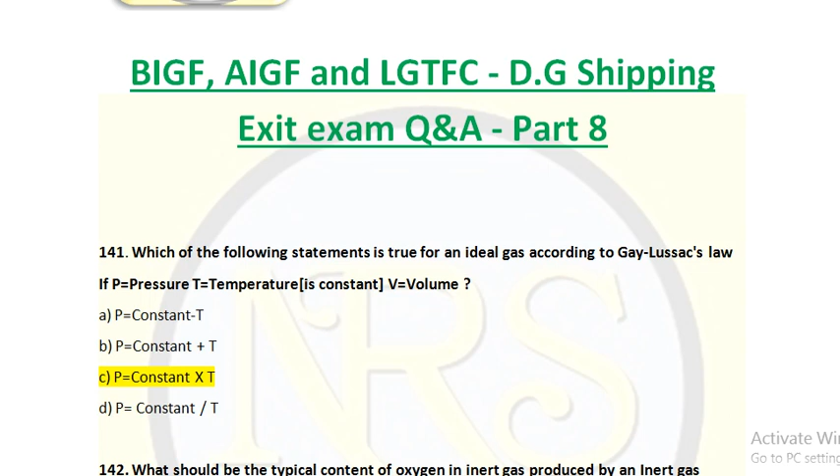Question number 142. What should be the typical content of oxygen in inert gas produced by an inert gas generator on board an LNG carrier? Option A 0.5%, option B 12.6%, option C 7.5%, option D 13%. The correct answer is option A 0.5%.

Question number 143. How is intrinsic safety achieved for electrical circuits used in hazardous spaces? What they are asking is how any light, any equipment is considered safe to use in the hazardous space. The answer is by limiting the ignition energy and surface temperature that can rise during operation. So they are reducing the ignition energy, the combustion energy, and the surface temperature, which would lead to a hotspot.

They are reducing it, they are limiting it, so that will help in operating condition. When it is operating, this will not occur. It will not release such a high heat energy. It will not become a heat source for combustion to happen. That's what they are trying to say. So question number 143 answer is there.

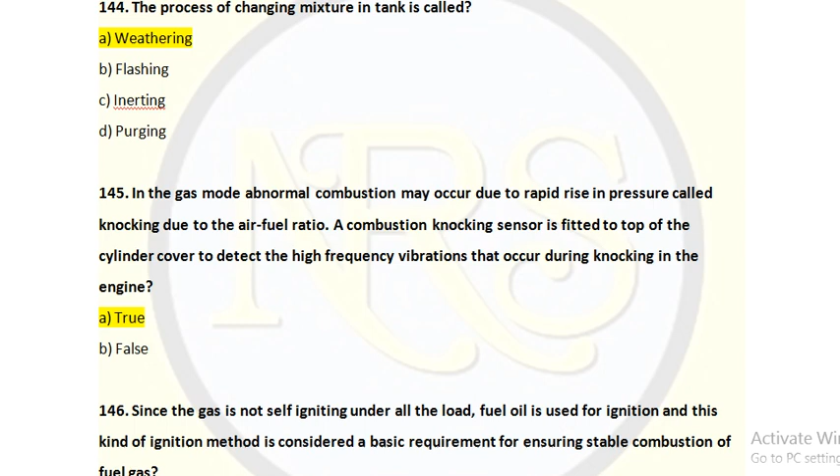Question number 146. Since the gas is not self-igniting under all loads, fuel oil is used for ignition, and this kind of ignition method is considered a basic requirement for ensuring stable combustion of fuel gas. Option A true, option B false. Correct answer is option A true.

For non-self-igniting gases, say gas has an auto ignition temperature of 553 degrees Celsius to around 1103 degrees Celsius. So this is varying. Auto ignition temperature you can take as 595 degrees Celsius. It can vary with the combustion gas, since the gas consists of methane, propane, butane. With the ratio it will vary.

So we generally take it as 595 degrees Celsius, which cannot be achieved by compressing the air. The compressed air will not produce that much temperature. So in order to achieve this, we need some pilot injection that will create an initial ignition. That ignition helps to raise the temperature to 595 degrees Celsius or above. Then the gas gets heated and it will be burned in a complete combustion process. So this is correct. So question number 146, option A, true, is the correct answer.

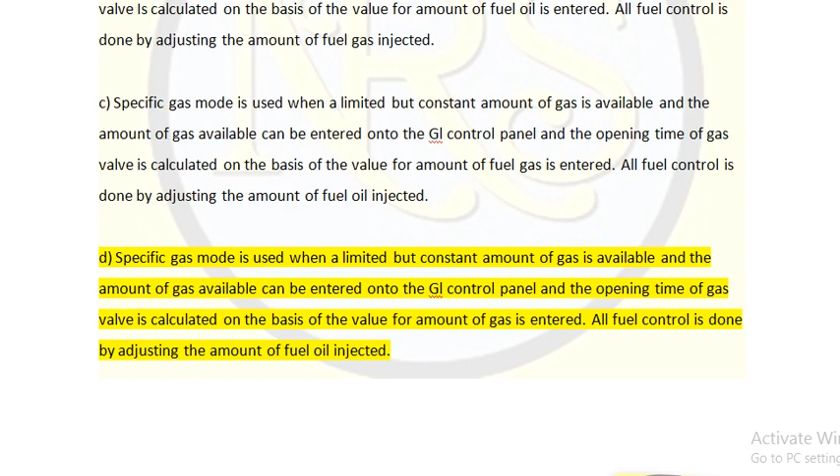Option D: specific gas mode is used when a limited but constant amount of gas is available, and the amount of gas available can be entered onto the GI control panel, and the opening time of the gas valve is calculated on the basis of the value for amount of gas entered. So what they are telling is, in specific gas mode a constant amount of gas is available. The amount of gas available can be entered into the GI control panel. This is nothing but the GVU unit, control valve unit.

In the control valve unit, the opening time of the gas valve, how much it will open, is calculated on the basis of the value for amount of gas entered. So how much the valve opens mainly depends upon the amount of gas entered to the GVU. That value it will take into consideration. All fuel control is done by adjusting the amount of fuel oil injected.

So there should be pilot injection in order for combustion to take place. For that we need fuel control. We cannot inject more, we cannot inject less. So fuel control is done by adjusting the amount of fuel oil injected. Amount of gas is controlled by the GVU valve. This is the correct answer. This is called specific gas mode. So for question number 147, the correct answer is option D.

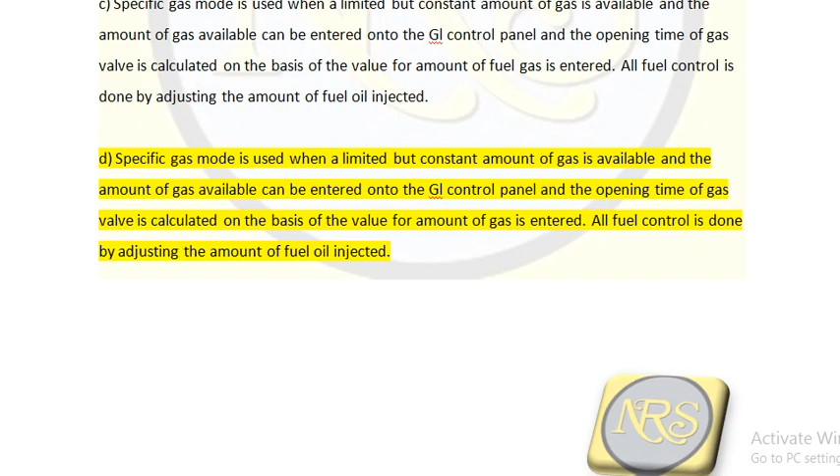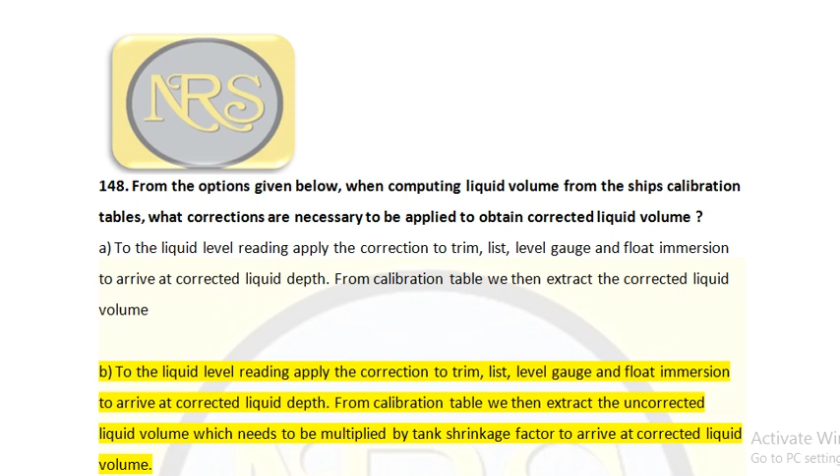Question number 148. From the options given below, in computing liquid volume from the ship's calibration table, what corrections are necessary to be applied to obtain corrected liquid volume? Option A: to the liquid level reading, apply the correction of trim, list, level gauge and float immersion to arrive at corrected liquid depth. From the calibration table, we then extract the corrected liquid volume.

Option B: to the liquid level reading, apply the correction of trim, list, level gauge and float immersion to arrive at corrected liquid depth. From the calibration table, we then extract the uncorrected liquid volume, which needs to be multiplied with the tank shrinkage factor. So when there is a change in temperature of the liquid, the tank will shrink. If it is a positive temperature, it will expand. When it comes to negative temperature, it will contract.

It will become small. Same as what we do for the generator engines, where we put the valve seat on the cylinder head. We keep it in the fridge room and it will be cooled down. Then it will be easy to fit, the shrink fit method. So with the change in temperature, the metal will contract. That fact will also be considered. That is what I was trying to say in option B.

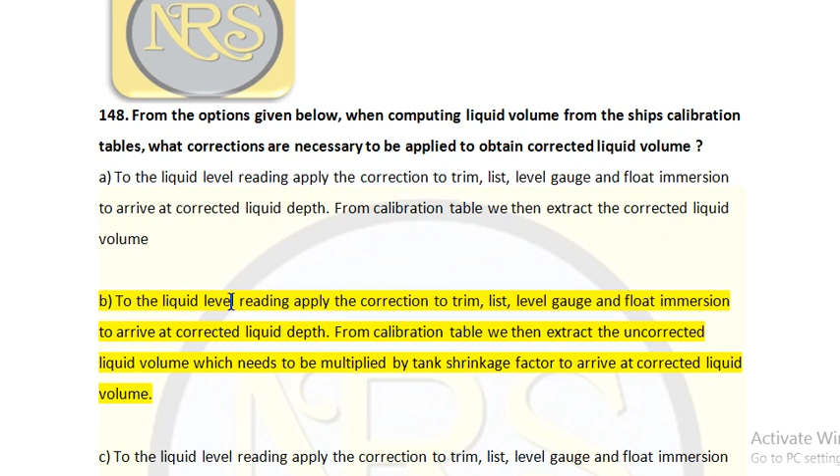Option C: to the liquid level reading, apply the correction of trim, list, level gauge and float immersion to arrive at corrected liquid depth. From the calibration table, we then extract the uncorrected liquid volume, which needs to be divided. It's not divided, you have to multiply. Then only you will get the proper reading.

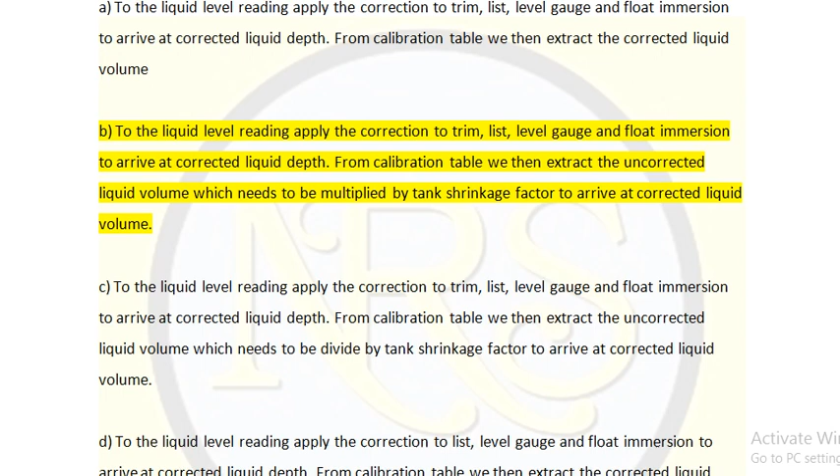Tank shrinkage factor to arrive at corrected liquid volume. Option D, to liquid level reading, apply the correction of list, correction of level gauge and float of immersion to arrive at corrected liquid depth. From the calibration table, we then extract the corrected liquid volume. So for question number 148, option B is the correct answer.

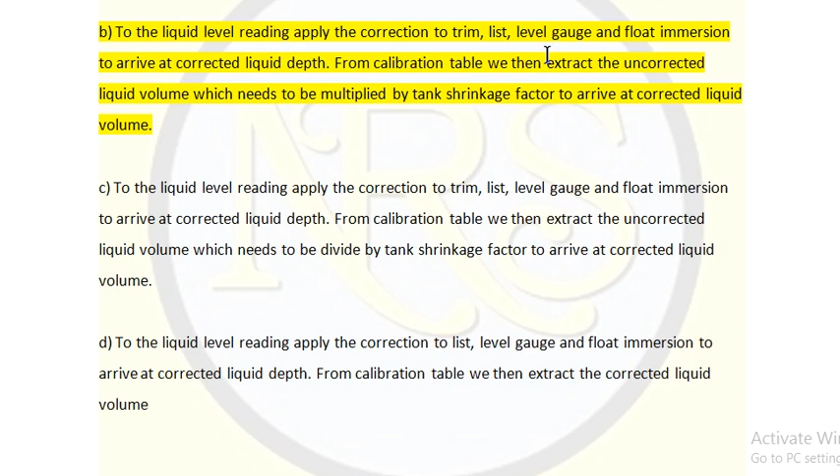Question number 149. Identify false statement with respect to various types of radiant energy given by fire. Option A, visible light. Option B, infrared radiation. Option C, ultraviolet radiation. Option D, ultrasonic radiation. The correct answer is option D, ultrasonic radiation.

So you see the variation of radiant energy. All these energies are related to light that will liberate heat. This one, ultrasonic radiation, is related to sound. So this is different; it is not giving any energy for fire. So for question number 149, option D is the correct answer.

Question number 150. Gas ship surveys under IGC code shall not include. Option A, window of plus or minus 3 months before and after anniversary date of annual survey of COF. Option B, additional mandatory survey whenever any important repairs or renewals are made. Option C, additional survey should ensure that any repairs or renewals are effective and ship is fit to proceed to sea.

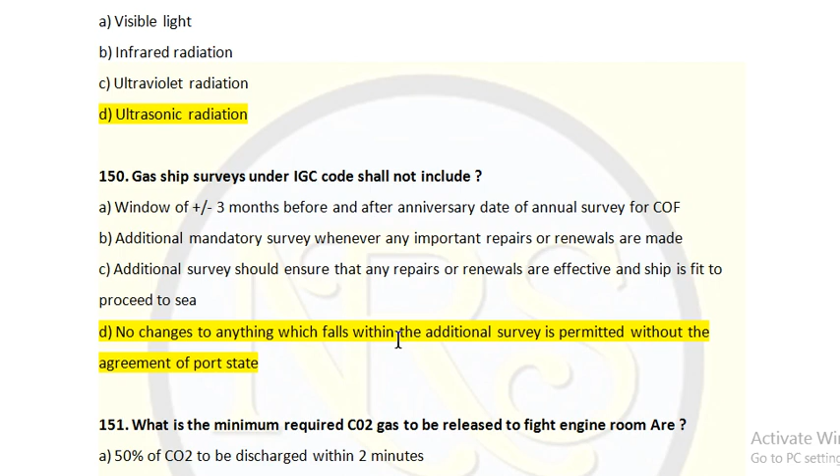Option D, no changes to anything which falls within the additional survey is permitted without the agreement of port state. So in gas ship survey IGC code, option D is not included. No changes to anything which falls within the additional survey is permitted without the agreement of port state. This is the one which is not in the IGC code.

Question number 151. What is the minimum required CO2 gas to be released to fight engine room fire? Option A, 50% of CO2 to be discharged within 2 minutes. Option B, 60% within 2 minutes. Option C, 70% within 2 minutes. Option D, 85% within 2 minutes. The correct answer is option D. This is as per FSS code and SOLAS chapter 2.

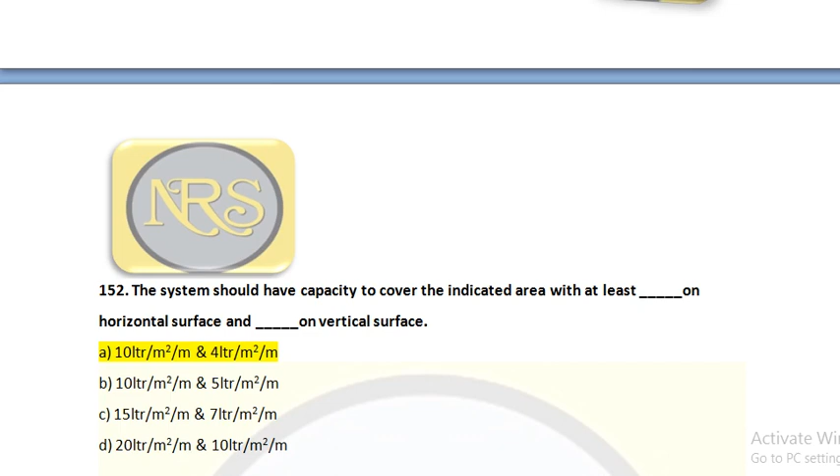Question number 152. The system should have capacity to cover the indicated area with at least dash on horizontal surface and dash on vertical surface. Option A, 10 liters per meter square per minute and 4 liters per meter square per minute. Option B, 10 and 5 liters per meter square per minute. Option C, 15 and 7 liters per meter square per minute. Option D, 20 and 10 liters per meter square per minute.

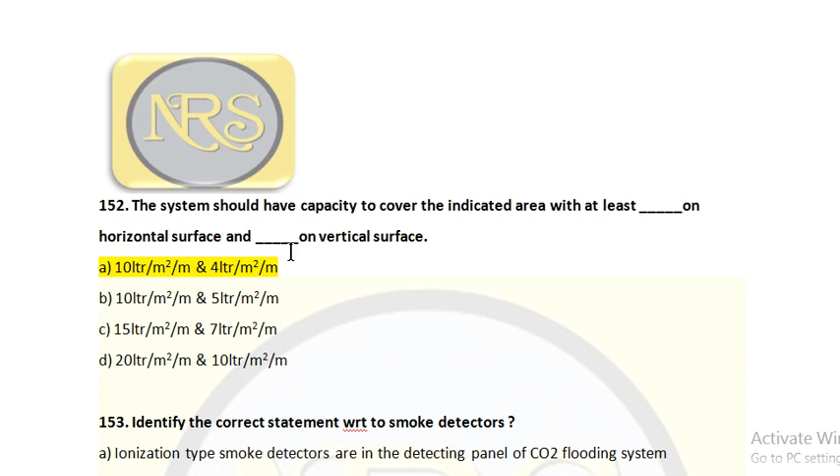And this is clearly mentioned in the IGC code, that is, capacity of the system should be at least 10 liters per meter square per minute for horizontal surface area and 4 liters per meter square per minute for vertical surface area. So option A is the correct answer for question number 152.

Question number 153. Identify the correct statement with respect to smoke detectors. Option A, ionization type smoke detectors are in detecting panel of CO2 flooding system. Option B, photoelectric type smoke detectors are in machinery space. Option C, photoelectric type smoke detectors are in the detecting panel of CO2 flooding system. Option D, ionization type smoke detectors are in machinery space. The correct answer is option C. It is a photoelectric type smoke detector in the detection panel of CO2 flooding system, so it will give the CO2 alarm.

Question number 155. Why is the maximum surface temperature identified for electrical equipment used in hazardous areas on board an LNG carrier? Option A, the limit is on minimum surface temperature as LNG cargo is cryogenic. Option B, equipment should operate within this limit to reduce the power and boil-off consumption. Option C, equipment should operate within this limit to prevent formation of hot surfaces. Option D, equipment should operate within this limit to reduce the heat transfer to cryogenic cargoes.